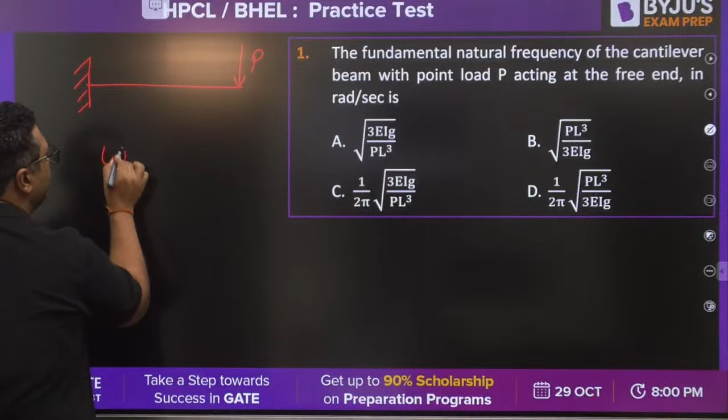Just like and share the session so other students also join. Solve this question, guys. They are saying there is a cantilever beam - this is a combination question of SOM and vibration, and there is a load P acting, and they are asking what would be the natural frequency of vibration due to that. That is the question. Solve it and tell me the answer. It is a very good question, guys, try to solve it.

Anu Ajay, good morning dear. Pratik, good morning. Dharawat, Kiran, Anu, Pratik, try to solve it and give me the answer. This is a question from vibrations, and it is about static deflection of mass. I am going to take care of all the design subjects: strength of material, theory of machines, machine design, engineering mechanics.

Ranjit, Vineet is saying the answer is A. Very good, Vineet. What about others? Kiran, Dharawat, Pratik, Ranjit, Anu, what would be the answer? Vineet has already given the answer as A. Kiran is saying the answer is C.

Let us see. This beam will be deflected like this, and this is given as the deflection of the beam at the point of application of load. This deflection Y is given as PL cube upon 3EI. When we talk about the method called static deflection of mass, also known as the Rayleigh method, according to this method omega n is given as square root of g by delta naught, where delta naught is the deflection at the point where the load is acting. So you just need to put this value here, and when you put the value, you get 3EIg upon PL cube. So the answer is A - Vineet's answer is correct.

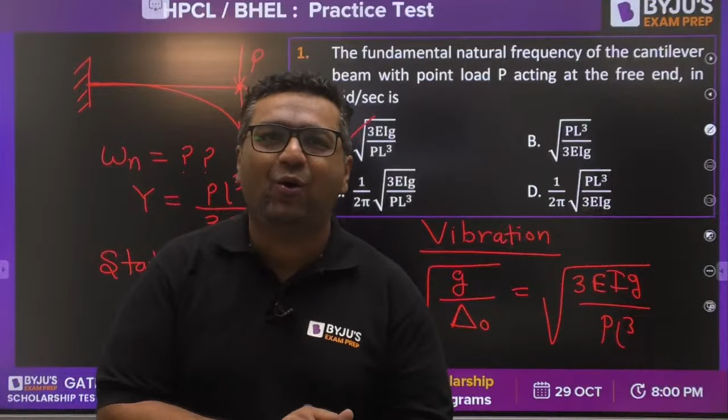HPCL GATE knowledge, I feel the answer is going to be A, because they have asked the answer in radian per second. Whatever you are saying, C would be the answer if they were asking in hertz. So guys, that is the mistake you have done. The question was asking the answer in radian per second, not in hertz. If they were asking in hertz, C would be the right option. Naveen, Chintan, I feel you understood your mistake.

Let us move to the next question. This is a question from material science, guys. Solve this question, they are asking about HCP atoms: the structure which has the highest packing of atoms. Just solve it, guys, what would be the right answer for this one?

Buddha Harsha Vardhan is saying A, Chintan is saying D, Naveen is saying A, Hania Amir is saying D, Parth is saying A, Achint Saxena is saying A, SK says A, Kishan A, Mani A, Kishan C, HPCL GATE knowledge says A, Mohan Raj A.

So guys, when we are talking about HCP, BCC, FCC, I feel everyone would be aware that for FCC the atomic packing factor is 0.74, for BCC it is 0.68, for HCP it is again 0.74, and for simple cubic it is 0.52. So if you see, for FCC and HCP it is going to be equal and highest. So the answer is going to be both A and C, which means the answer is going to be D.

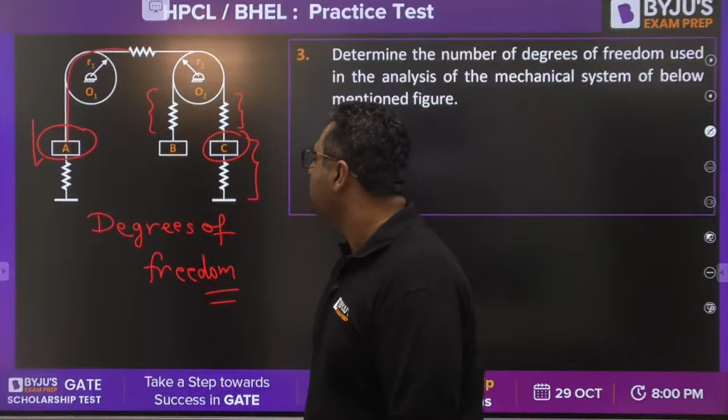So guys, if you see the degrees of freedom, first of all because of this mass, one motion will be there, and because this mass is directly connected to the string up to this point, there will be only one motion related to this one. Now, when we talk about this mass, this will also have one motion coming because of this spring-mass system. But because of this spring, one more degree of freedom will be attached to it, and because of this spring, one more degree of freedom will be attached to this. So guys, degree of freedom will be 4 for this case. One is coming because of this spring-mass system, another because of this spring-mass system, one because of this, and one because of this. Because they are directly connected, there will be no problem with rotation, and there will be no degree of freedom coming due to pulleys. So the answer will be 4 for this.

So Vineet has given the right answer. Vineet, you are doing very nicely, so I will say wonderful. If you perform in this way, definitely your selection is confirmed.

Next question is again from Theory of Machines, that is Coriolis component of acceleration. So guys, this is from Coriolis component of acceleration, what will be the answer? This type of question you can expect in BHEL, where calculations are involved much, so this is good for BHEL. The previous three questions were good for both BHEL and HPCL. What would be the answer?

Very good, Vineet. Wonderful, Vineet. Good understanding of yours.

What would be the answer for this one, guys?

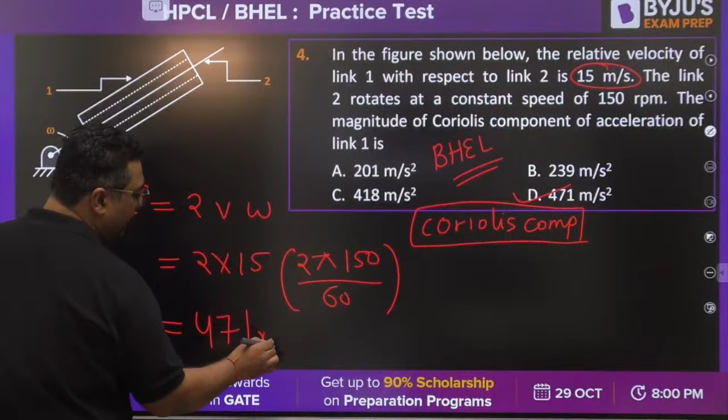Guys, your answer is correct. Because here they are asking Coriolis component of acceleration, which is given as 2 into V into omega. You know it is already mentioned that velocity is 15 meter per second, so you can write 2 into 15. Omega is nothing but 2 pi N by 60, and N is 150 divided by 60. When you put these values, the answer comes out to be 471 meter per second square. Yes, it will not come exactly 471, it will come 471.23.

Thanks Vineet for your wonderful words, for your faith. Thanks for that. Let us move to the next question, guys.

Now the question is from strength of material. This question is good for HPCL. So guys, the topic is strain energy.

Very good, Naveen, Kishan, Vineet, Parth, very good. Kiran, Chintan, Hania. What about others? I am waiting for your answer.

What would be the answer, guys? Strain energy they are asking. This is very easy, just apply the formula of strain energy. I am giving you a hint also: strain energy is half into P into delta. Just put the value of delta, you will get the answer.

Achint is saying D, Kiran is saying D, Chintan D, Shekhar Chandra D, Manas D, Hania Amir D, HPCL GATE D, very good. Pudina Yadav has also arrived. Parth D, very good guys.

So the answer for this is D, because when you put the value 1 by 2 into P, delta is nothing but PL upon AE. So when you put the value, the answer comes out to be P square L upon 2AE, and the answer for this is nothing but D. Very good guys, so D will be the right answer.

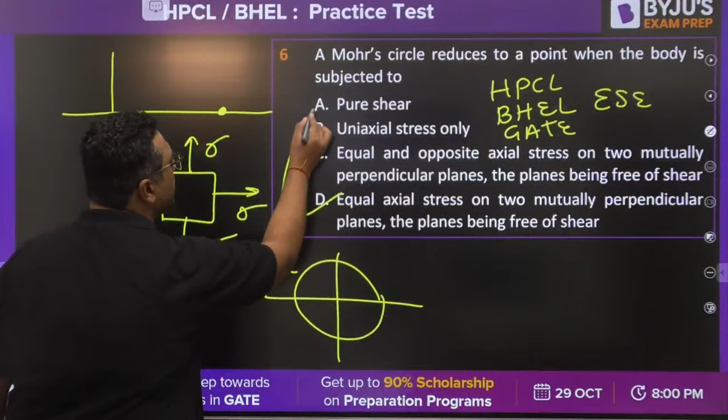So guys, the answer is D. You know that they are asking when Mohr circle is becoming a point for this state of stress. You know that when sigma equals sigma equals sigma equals sigma, this is the case, so for this, Mohr circle becomes a point. For pure shear, they are asking, Mohr circle is not a point, this is the case of pure shear. For uniaxial loading, this is the Mohr circle. So for uniaxial, this is the Mohr circle. So the answer is going to be D for this.

That's great, very good. So guys, the next question is from theory of machines, gear topic. It is a very easy question if you see. Very good, Vineet, Hania Amir.

Okay, so question number 7, guys. As I already said, we are going to cover 100 questions.

Ranjit is saying D, Deepak is saying D, Achint is saying D, Kiran is saying D, Sagnik D, Hania Amir D, Chintan D, Deepak Yadav, Vineet, Mani, HPCL Gate Knowledge, Parth Patel - very good, wonderful guys.

And the answer is D, because rack and pinion is the arrangement which converts the rotary motion into linear motion. So rack and pinion is the right answer, guys. This is from the application of gear.

As this practice session is for both HPCL and BHEL, I have taken some questions which are related only to HPCL level, some which are for BHEL - they are the difficult ones - and some which are for both. Next question is from aluminium.

What is the crystal structure of aluminium?

Deepak Yadav says FCC, Kiran says C, Ranjit says C, Chintan says A. Okay, so it means FCC only.

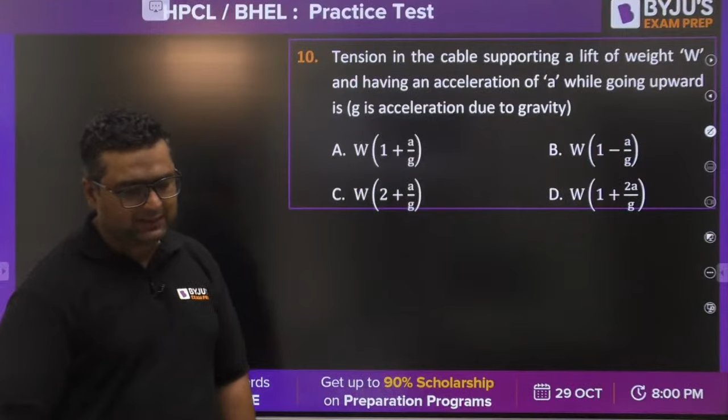So guys, this is once again from engineering mechanics. Tension in the cable supporting a lift of weight W and having an acceleration while going upward is - just solve it. This is a cable, W is the load. You just need to write the equation, considering it has an acceleration A while going upward.

Wonderful, Shekhar Chandra is saying A. HPCL Gate says A, Mani says A, Kishan says A. Very good, guys.

So you know that here will be W, here will be the tension, and here will be the acceleration. So what will you write? W is nothing but M into G, so mass can be written as W by G. So you write the equation: W minus T is equal to W by G into A. When you find out the tension, it comes out to be W plus... wait, I have put it something wrong.

W into 1 plus A by G - A will be coming as the right answer. Yes, I had put the values wrong. So the answer will be A, because it is going upward. When you put this value, it becomes T minus W is equal to M into A, where M is nothing but W by G into A. So you will get the answer as A.

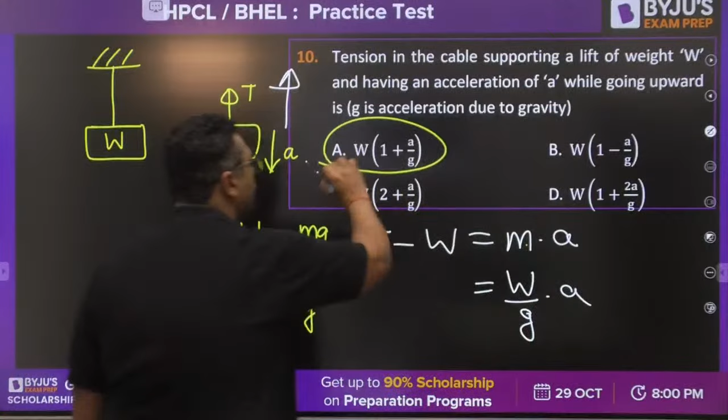Wonderful, great. Fine guys, next question.

This is once again from balancing, theory of machines.

Pragnesh, Chintan - very good. Going up - yes Abdul, wonderful. Abdul, you also came after so many days. How is your preparation going on? Yes Abdul, if you want any kind of help, you can connect with me, okay? Because I feel after so many days you've come back.

Sagnik is saying C is the answer. What about others? Kiran is saying B. Yes, Chintan. Pragnesh, what would be the answer? Vineet is saying C, Hania Amir C, Chintan C, Gajodhar C, Pragnesh 50.

Here what you need to do is M1 R1 equals M2 R2. So a body A weighing 10 kg with its CG at 25 centimeters. This is 10 into 25 equals 5 into R2, and you need to find out R2. So you will be getting 50 centimeter as the answer. Yes, 50 centimeter will be the answer.

Wonderful, guys, so this is again of Hpcl type. Let us move to the next question. Now once again we are entering into the strength of material. This is about point of contraflexure.

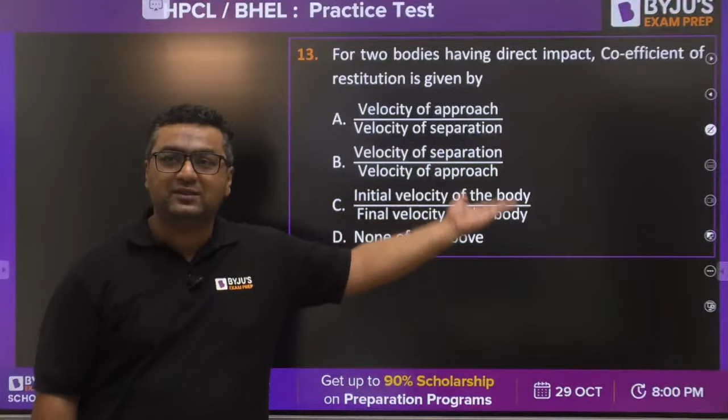Achint is saying A, Kiran B, Kishan B. Look, for this question also you guys are giving different answers. Abdul is saying B, Shekhar B, Hania Amir B, Mani B. So guys, when we are talking about this, it is velocity of separation by velocity of approach. The answer is going to be B. This is about coefficient of restitution.

Very good, Vineet, Naveen. Next question, guys, this is from strength of materials. This is a good one, and this is also good for GATE examination. This is also good for BHEL. Hpcl you can say yes, because this is not involving much calculation.

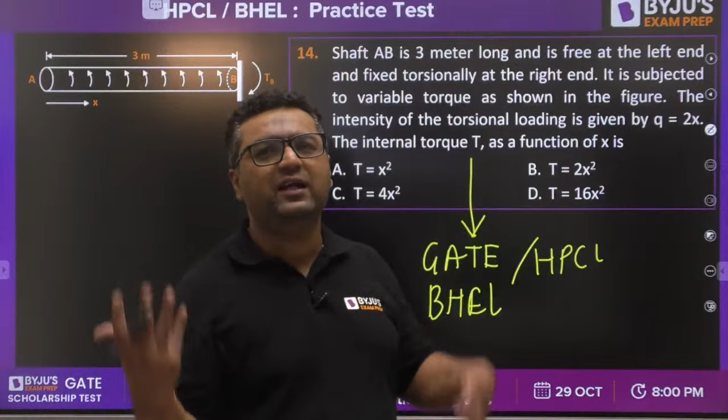Ranjit, velocity of that - whatever I have mentioned, the coefficient of restitution is defined as velocity of separation by velocity of approach. If you have any doubt, I will share you the notes of mechanics. You can go through that in the collision topic, what is final by initial, initial by final. Everything is defined there. Good afternoon, by Prem Nalla.

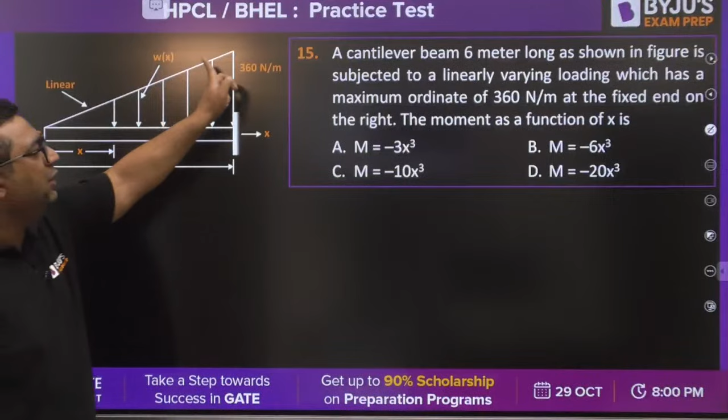So guys, next question is this one. This is a cantilever beam, 6 meters long, as shown in the figure. You have a uniformly variable loading, and they have mentioned this W value as 360 Newton per meter, and the moment as a function of x. You need to write down the equation for moment.

Okay, already answers are coming.

Sir, please give more focus on HPCL. Okay Kishan, because BHEL is postponed, that is the reason, don't worry. Since BHEL is now postponed, whatever upcoming sessions there are this week after Diwali will be only for HPCL. This particular session was already planned before BHEL postponed the date, so in this session we are taking both types. Otherwise, in the upcoming week, whatever sessions there will be, we'll concentrate only on HPCL.

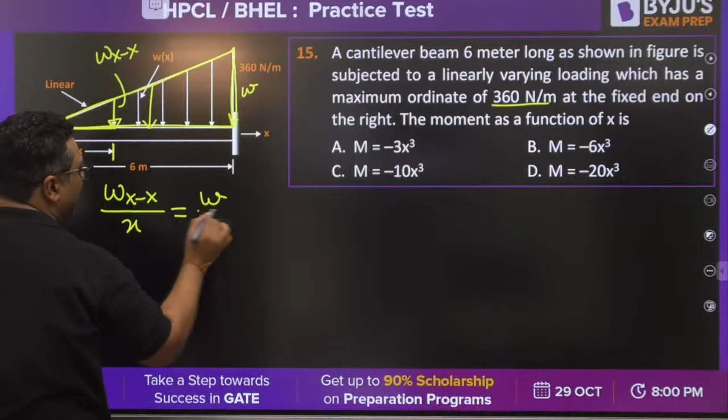Okay, so the answer is coming like this. Let us see. So guys, first of all, if you want to write the load at any instant at a distance of x, if you want to write down this intensity, we will take two triangles. One triangle is this, other triangle is this. So if you take these two triangles, I am writing this load as load intensity Wxx. So I can write Wxx divided by x equals the total W divided by L. So I can write Wxx as equal to W into x by L.

So if you want to write down the bending moment equation, I will take a section here, and to the left hand side of the section, this is the load intensity, this is Wxx. So if you want to write down the moment because of this, you will make the area of the triangle act at the centroid of the triangle, which is at a distance of x by 3. So you just need to do the area of triangle, which is 1 by 2 into Wx by L into x. This is the area of triangle acting at x by 3. And this is nothing but the bending moment equation Mxx. This is creating hogging, so a minus sign will come: minus Wx cube upon 6L.

Now put the values. You know that W is nothing but 360. It is minus 360 divided by 6, length is also 6, into x cube. So you will be getting the answer to be: C, M equals minus 10x cube.

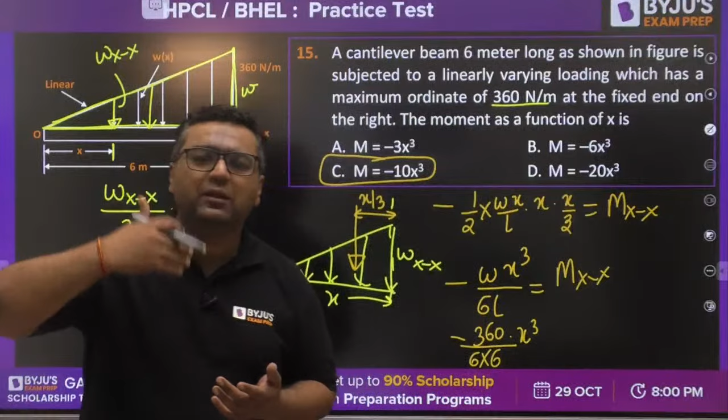Sir, TOM's one shot marathon formula - yes dear, after Deepavali it will happen. After Deepavali, we will be having theory of machines, engineering mechanics, machine design - these are the topics pending with me. And after that, we will be coming for the marathon of each and every subject, so don't worry about that.

Okay, moving to question number 16, guys, now. So next question is related to, once again, the strength of material. Let us see how many of you give the right answer for this.

Sir, GATE ke liye mock test - yes, after Deepavali it will be there. Very good, Abdul, wonderful guys. Solve this question, guys, now.

Solve this question, guys, this is a calculation-based, BHEL type of question. So guys, if you see here, both the bars, if we separate them, the load in them will be the same, which is 175 in compression. Here it is 175, you can apply method of section or free body diagram, and here also 175. So you just need to find out the deformation. Obviously compression is coming, so delta total will be delta 1 plus delta 2. So you just need to add them, and overall it is compressive, that is very much clear. So you just need to apply PL upon AE, apply that, get the answer.

Very good. Vineet is saying B, Kiran is saying B, Pragnesh is saying B, Gajodhar is saying B. बहुत ही जल्दी कर लिया आप लोगों ने.

Very good, let me check the answer. Yes, 175 by 168 is correct one. Wonderful, Abdul, बहुत बढ़िया, God of Thermodynamics, बहुत ही बढ़िया. Guys, the answer is correct, 175 by 168 mm is the right answer. Yes, Kiran Nayak, बहुत ही शानदार, guys. Moving to the next question, guys.

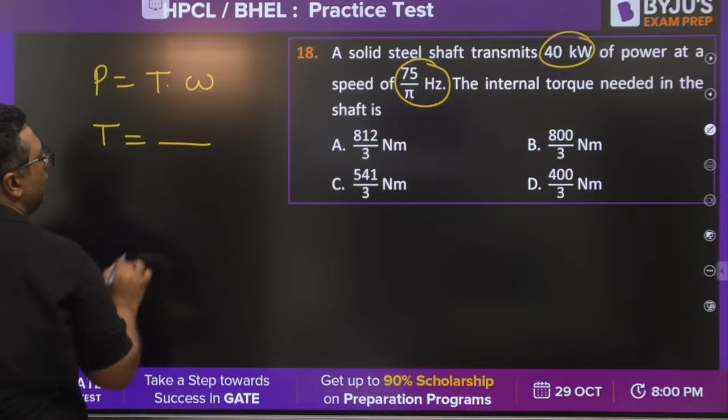Once again this is from strength of material. This time they have given you the power, and they have also mentioned the frequency in hertz. So they are asking you the torque. You know power is T into omega. From here you need to find out the torque, and omega is nothing but 2 pi f. So f is given to you, use it, get the answer.

Yes, Vineet, बहुत बढ़िया. So guys, don't worry. My portion, once it will be over, then next faculty will be coming for the next part. So 4 faculties, all 4 will be joining for this session, and you guys will be getting 100 good questions in this session. Minimum 100 I am saying, because I am exceeding, 3 questions more I will be taking. So in place of 25 I am going to take 28 questions. So 103 questions are confirmed for you.

Wonderful, guys. Achint, Chintan, Pragnesh, Shekhar Chandra, Vineet, Ranjit Kumar, Hania, Amir. The answer for this is nothing but B, 800 by 3 Newton meter. So torque will be coming out to be 800 by 3 Newton meters.

Okay guys, moving to question number 19 now. This is once again from strength of materials. A simply supported beam, the point of maximum moment in the beam from RL is. They have even calculated the support reactions for you. So you need to find out the point where bending moment will be maximum. You know bending moment is maximum where dM by dx will be 0, which is nothing but shear force. So you write the shear force equation, equate it to 0, you will get the answer. Very easy question, guys.

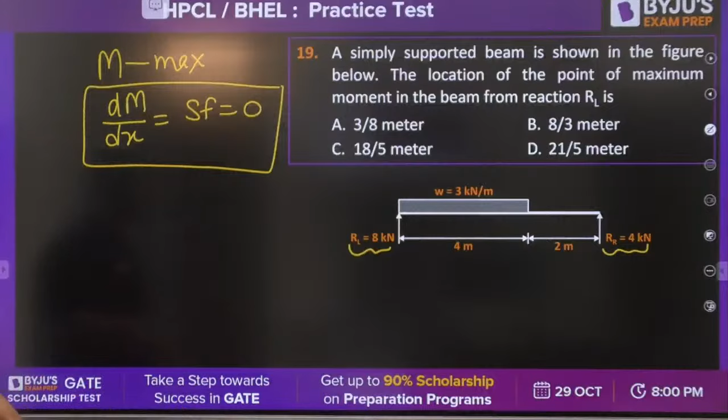Definitely some of you are going to get selected in HPCL and BHEL. Ranjit Kumar Yadav, the answer is 8/3 meter. So you just need to write down the equation. Shear force equation at any section is, this is plus RL minus W into X. So when you will be putting it equals to 0, so you know that RL is 8 is equals to 3 into X. X will be coming out to be 8/3 meters. Okay, yes, this question would be good if they would be asking the distance from RR, then many students would be doing the mistake. So the answer is B, that is correct.

Moving to question number 20th, guys. Okay, so just go to description box for downloading the ebook and all. This is a very good question from thermal stresses. Very good question from thermal stresses.

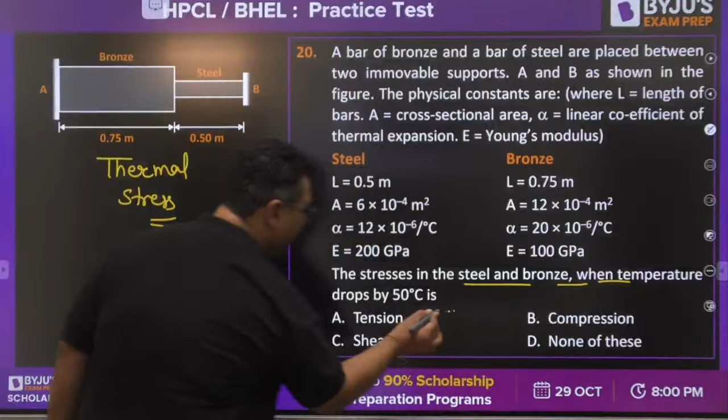Okay, so Kiran is saying A, Vineet is saying A. So guys, just you need to see one thing, that the stresses in the steel bronze when temperature is dropped by 50 degrees Celsius. When temperature will be dropped, you know that all the bodies in this universe except water, they expand on heating, contract on cooling. So we are going for cooling, so definitely my dear, they will try to contract. When they will try to contract, these supports will be applying the forces in this direction, because they will try to leave, the support will apply reaction opposite to that, and because of these reactions, both the members will be coming under tension.

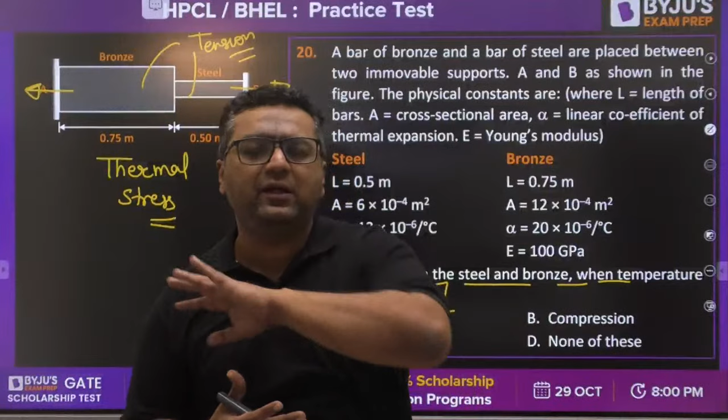In the question some extra part is there, but in actual this is just a concept game. This extra part you can use to find out those stresses also, then it becomes a question of gate level. In gate, they will not ask this, they will ask the stress values.

Moving to the next question. So guys, this is a combined question from SOM and machine design - this is from design of shaft.

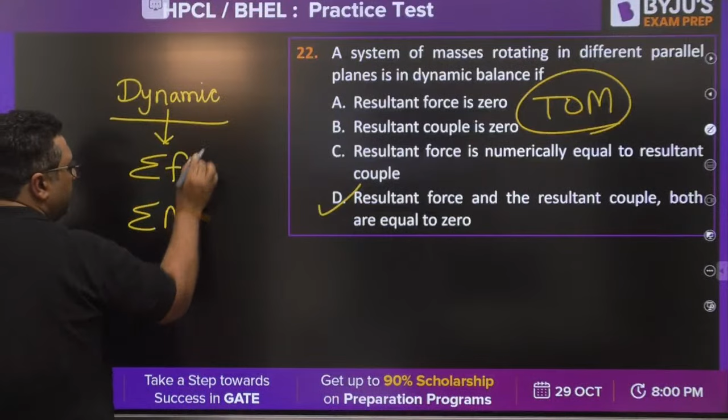So the answer for this is D, because when we are going for dynamic balancing, the summation of forces and summation of moments both need to be balanced. Whereas in static balancing, we need to cover only forces, moments are self-balanced.

Moving to question number 23 guys, this time from spring, machine design question. This question is from spring, cutting of spring, machine design. You can also call it vibration, I have covered it for you. Solve it guys.

Very good. Lavanya Patel is saying A. Ranjit Kumar Yadav is also saying A. Kiran Kumar is also saying A. Vineet Shah is also saying A. Pragnesh A, very good.

So guys, you know that if we have a spring and if that is divided into 2 equal parts, then individual stiffness will become 2K. So if that division will be in n parts, then individual stiffness will be nK. So the answer is A, because stiffness is inversely proportional to length - when length becomes 1 by n times, stiffness will become n times.

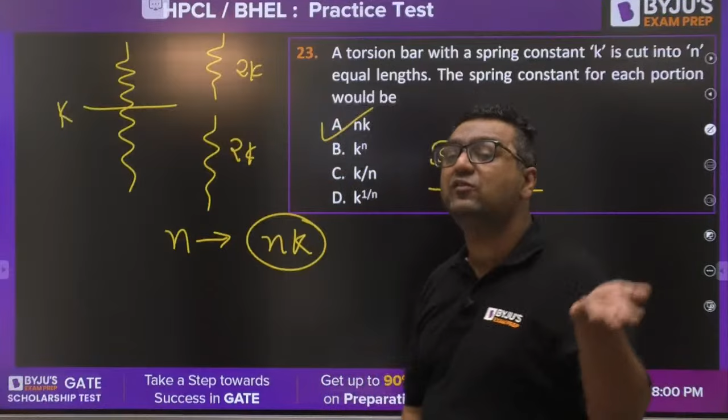So guys, question number 24, again from vibration, logarithmic decremental ratio. Ha Lavanya, needs to be 0 - resultant force, resultant moments needs to be 0.

So logarithmic decrement of a damped single degree of freedom system is delta. If stiffness of the spring is doubled and mass is made half, then the logarithmic decremental ratio, delta equals 2 pi zeta by square root of 1 minus zeta square, where zeta is C by 2 root KM. Now you need to answer it.

So guys, they are saying that stiffness of the spring is doubled and mass is made half. So when stiffness is doubled and mass is half, overall will remain the same. So the answer will be B. Delta will be the right answer.

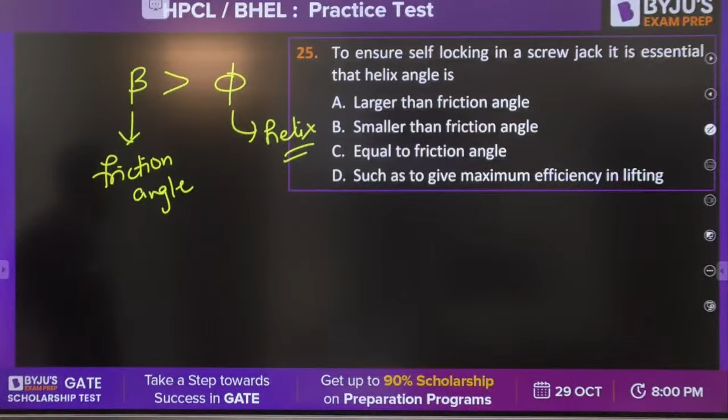Self-locking condition will be coming when beta is more than phi. Beta is friction angle, phi is helix angle. This is the condition for self-locking: beta is more than phi. So helix angle should be smaller than the friction angle.

B will be the right one. Some of you have given the wrong answer for this. Moving to the next question, guys. This is the 26th one, 3 more questions.

Solve it, degree of freedom. How we can find degree of freedom, theory of machines. What would be the answer for this? You need to apply the formula 3 into L minus 1 minus 2J minus H. Very good, Achint, Mani, Chintan.

Question number 26. 2 more questions I will take, and then the next faculty will come for the next part.

Grubler's or Kutzbach - some are saying B, some are saying D. First of all, the number of links: 1, 2 and 3, so the number of links are 3. Minus 2J, joints - this is joint, this is joint. Higher pair is 1, this is higher pair. So 3 into 2 is 6, minus 4, minus 1. Answer is 1. A would be the right answer, guys.

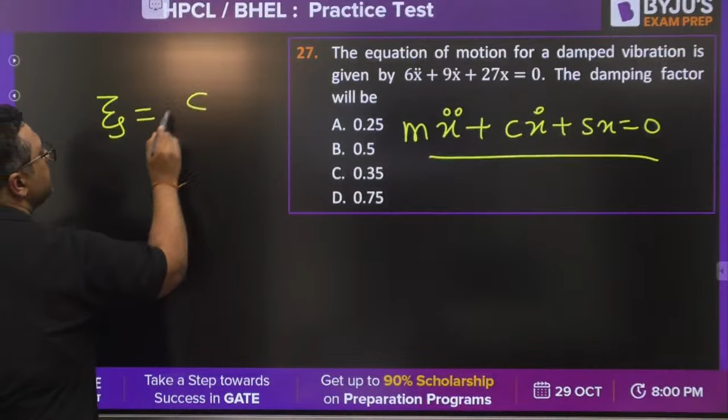This is once again from vibration. They are asking you the damping factor. You can see the equation like this, compare these two equations. MCS, damping factor, you need to find out. Zeta is damping factor, C by 2 root SM. Solve it and get the answer.

After this, one question from machine design, brakes is there. Shivanada is saying 1, but 1 is not in the option, I feel.

Okay, for 26 you are saying. Kiran is saying 27th ka C. Lavanya is saying C, Vineet is saying C, very good. Pudina Yadav is saying C, very nice. Pragnesh C, Ranjit Kumar Yadav C, very excellent, guys. And the answer is C.

You just need to put the values. 9 divided by 2, S is 27 into 6. The answer will be 0.3535. Answer is C. So guys, the last question from my side.

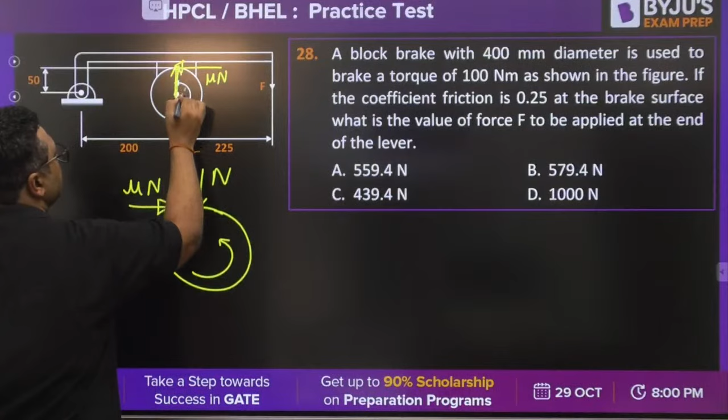From the brakes, last question from my side. You can see this is force F acting. If we are going for the free body diagram, this is rotating like this, so normal reaction on this will be coming and friction will be coming like this. The same friction will be coming on the lever like this, and normal reaction will be coming like this. So you just need to take moment about O.

Summation moment about O to be 0, you will get the value of F. You can see F is creating clockwise moment, so plus F into 425. Then N is creating anti-clockwise, minus N into 200. Then this is creating anti-clockwise, minus mu N into 50. Equate it to 0. They have given you the diameter value and the braking torque value. Braking torque is nothing but mu NR. From here you can find out N, put it here, get F. This is BHEL type of question.

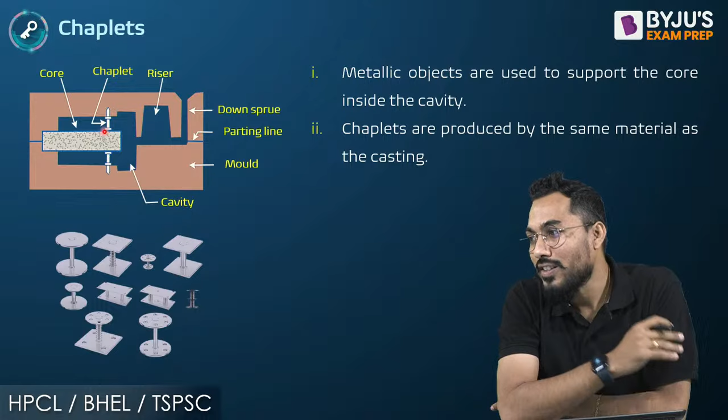So what is the answer - Mani, Vinith, God of Thermodynamics, Anchit and everybody - the answer would be exactly related to casting. It is related to the casting process. This would be my typical answer. Chaplets are used in the casting process, right? Next question.

The next question: the tendency of material to fracture without appreciable deformation - what is that called? Will it be called plasticity, stiffness, brittleness, or toughness? What will it be called?

Very correct everyone - Vinith, Shiva, Lavanya, God of Thermodynamics, Ania. We know there are two types of materials available - one is ductile material, second is brittle material. Ductile material can undergo maximum plastic deformation before fracture takes place, but brittle materials are the ones which do not undergo that much plastic deformation.

That can be observed from the UTM testing machine. Whenever we apply uniaxial tensile force on the body, the body will go through a lot of stress, but the deformation is very, very small.

So suddenly the body will fracture. Therefore, can I say that brittle materials are the ones which do not undergo much plastic deformation? This property is called brittleness property. Very interesting question. Is it accepted? Yes, brittleness would be the name.

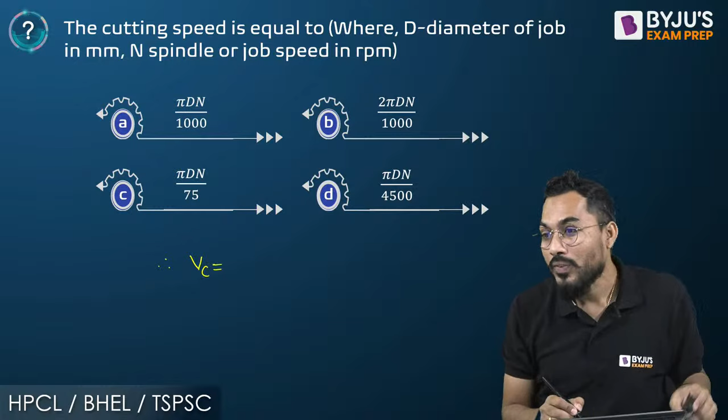It's very simple - can I say cutting speed VC is exactly equal to pi d n? Pi d is in cutting speed, so it will be exactly equal to pi into d into n, which will be exactly equal to cutting speed.

Divided by what? Diameter is generally given in millimeter. So can I say that this diameter, given in millimeter, has to be converted into meter? That's why I'll divide it by 1000. Is there any answer?

Yes sir, A is the answer. Vinith, Ania, Mani, Shua, very correct. What is that? Pi d n divided by 1000. So this will be my answer.

Divided by 1000, why? Because the diameter is clearly given in millimeter, and to convert that millimeter into meter, I divide by 1000. Is it understood? Yes. Next question is coming.

If the rake angle of the cutting tool is alpha - let's say it is alpha, the rake angle of the cutting tool. Phi is the shear angle. And V is the cutting velocity.

Then the velocity of the chip sliding along the shear plane is given by what? What will be the value of the shear plane velocity? What is meant by shear plane velocity - the velocity of the chip along the shear plane.

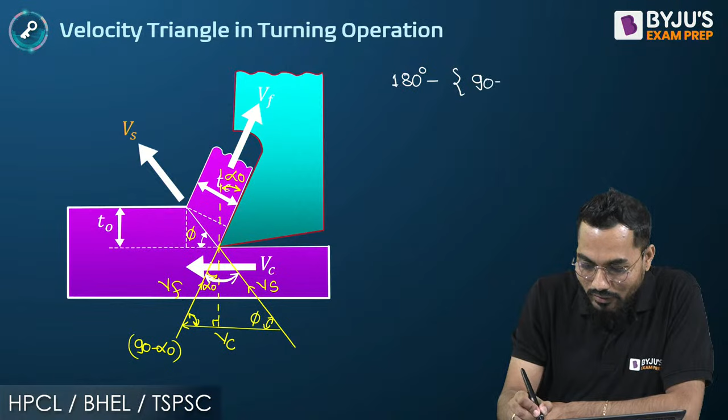This total angle in this triangle, how much will it be? That will be 180 degrees minus 90 minus alpha 0, plus phi. Is it okay? Yes. So if I simplify that, this angle will come to 90 minus phi minus alpha 0. Is it correct?

Yes. Now apply the sine rule. Can I say cutting velocity Vc divided by the sine of the opposite angle, that is sine of 90 minus phi minus alpha 0? So can I say it will be cos of phi minus alpha 0?

Which is exactly equal to shear plane velocity Vs divided by the sine of the opposite angle, 90 minus alpha 0. So again it will be cos of alpha 0. So I'll take cos of alpha 0 to the left hand side.

So I'll say shear plane velocity Vs is exactly equal to cutting velocity V, written as cos of alpha 0 divided by cos of phi minus alpha 0. So what is the answer? V cos alpha divided by cos of phi minus alpha 0.

So what is the answer? The answer is A, not B, not C. It is not sine, it is coming cos, it is coming cos. Are you accepting, everyone? Why did everybody make a mistake? That's why you should never mug up the formula. You should only focus and concentrate on the things related to the figures.

So easily we can calculate this. Is it okay? Are you accepting everyone? Mani, Pragnesh, Kiran, Lavanya, are you accepting A is the correct answer here? A is nothing but the correct answer here. Look how the trap is there. Okay everyone?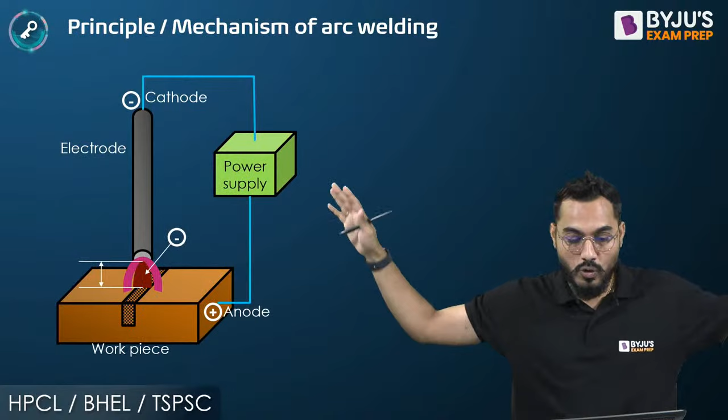I think you are understanding. Next question, very interesting question.

What is it? Anyone see? Absolutely correct, it's very simple. How to calculate that? There is a derivation that comes into the picture - shear force and normal force can be converted in terms of FC and FT, or calculated in terms of FC and FT.

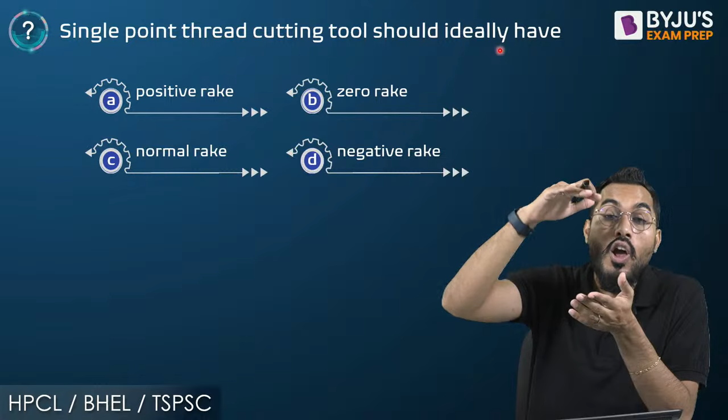It is very true, sir. Whenever I am utilizing zero rake angle, whichever chip is generated will be thrown away easily from the machining zone. If it is a positive or negative rake angle, there might be chances that it will damage the thread profile, because the chip might flow in a lateral direction. That should not happen.

Therefore, to protect the flank surfaces in the thread cutting operation, I have to generate my single point cutting tool with 0 degree rake angle. This will be my answer. 0 degree rake angle has to be there. Is it okay, Kiran Kumar, Pragnesh, Umar Sheikh? Right, 0 degree. Next question.

In electric discharge machining process, the workpiece and electrode are submerged in. In EDM, electric discharge machining process, the tool and the workpiece are immersed in a certain medium. Which medium? Is it immersed in a dielectric medium, an abrasive slurry, an electrolytic solution, or a vacuum?

Sir, it is very correct. It is not an abrasive slurry, boss. Abrasive slurry is utilized in an ultrasonic machining operation. It is the electric discharge machining operation where the dielectric medium is used, in which this entire tool and the workpiece is submerged.

And why dielectric? Because there will be a potential difference created between the tool and the workpiece, across the optimum gap, and because of that potential difference, there will be a sudden discharge of electrical energy, which is called arcing. So I'll say dielectric fluid, not a vacuum. Vacuum is not created, boss, in the electro discharge machining operation.

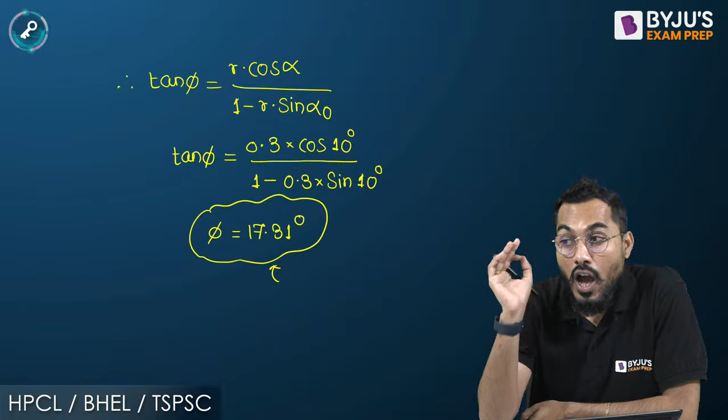This is exactly the answer as far as the phi value is concerned. So phi value is calculated, the shear plane angle phi is calculated. And once you calculate the shear plane angle phi, you put all the values there.

So shear strain is exactly equal to cot phi, that is cot of 17.31 degrees, plus tan of phi, that is tan of 17.31 degrees, minus alpha 0, that is 10 degrees. So the shear strain is coming out correctly. Mithun, Kiran Kumar, Pragnesh, Pratik, Umar, Kuldeep Singh, and everybody has calculated it correctly. It is coming to 3.34 shear strain.

What is the unit of that? Sir, it is a unitless quantity because it is shear strain. Strain has no unit. So therefore this will be my answer.

Dekho, a very simple question on the metal cutting platform was asked. Without a calculator, the questions won't be possible. Yes, right, the questions will be possible, won't be possible like this. But these are the questions that are coming, right, fine.

Next question. In a dash process, the cross section of the bar is increased at the cost of reducing its length. So can I say that there is a bar whose cross section area has to be increased at the cost of the length reducing? This operation is called drawing down, or spinning operation, or upsetting operation, or reaming operation.

Now in HPCL, these questions won't be asked. These questions will be asked in BHEL, or it can be asked in TSPSC or some other exams. If calculator is not allowed, then simple questions like theory questions would be asked, and that's why we are taking a lot of theory questions so that we'll get a feel of that.

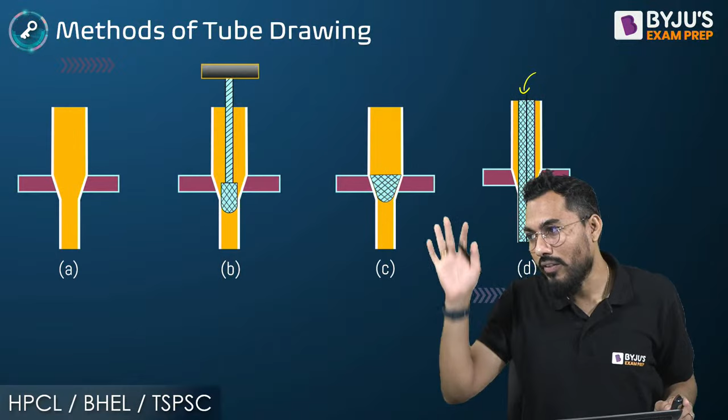What is the answer then? So very simple - my answer will be exactly equal to tube drawing is the one where moving mandrel is utilized. And let's see, this is just a random fundamental question. I think everybody has given a correct answer. Very correct answer given by everybody. Right, fine, next question.

Again there is one scintillating numerical asked. Let's see - in an orthogonal cutting, the depth of cut is 0.5 mm, at a cutting speed of 2 meter per second. If the chip thickness is 0.75 mm, the chip flow velocity - that is VF, chip flow velocity, the velocity of chip with respect to tool, because chip is flowing over that particular tool, over that rake surface.

So calculate chip flow velocity and tell me what will be the answer. Kuldeep, Pratik, Sai Kiran, Naveen, calculate. Very simple question, without calculator it has to be calculated. Tell me chip flow velocity. Depth of cut is given 0.5, cutting speed is given 2 meter per second, chip thickness is given.

1.33. Sir, we know that if I ask you a question, chip thickness ratio R - can I say the formula is chip flow velocity VF divided by cutting velocity V? What is that formula, VF by VC? Do you understand? Yes, there is one relation where chip thickness ratio can also be calculated as chip flow velocity VF divided by cutting velocity VC.

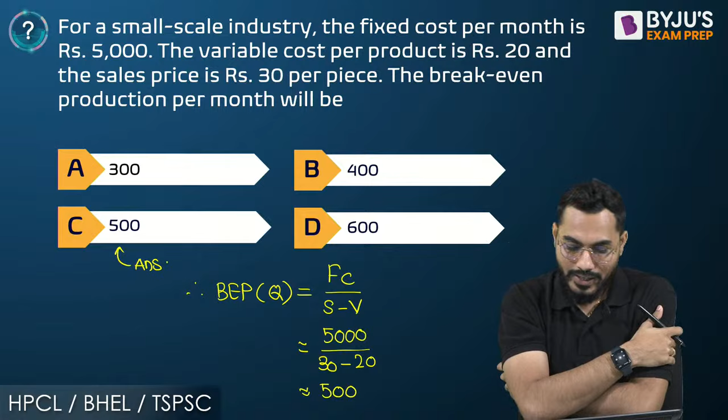Now you tell me, consider the following statement: the break-even point has to be increased. I have to increase the break-even point. Now, which of these statements is the correct one? So, for increasing the break-even point...

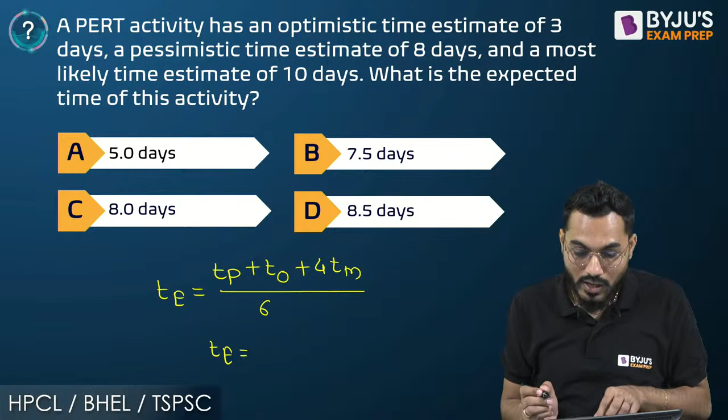So expected time is: pessimistic time is 8 days, optimistic time is 3 days, and most likely time estimate is 10 days, divided by 6. So how much is the answer coming? 7.5 days is the answer.

So there will be one homework question I'll give: the earliest time estimation of this particular event. Calculate the earliest time estimate. Is it 7.5 or 8.5? I'll say that 8.5, so Delhi D is the correct answer here, not 7.5, 8.5. Delhi D is correct.

Now you can go and check these questions. You can calculate the most estimated time calculation, and also calculate the economic order quantity. These two questions I have given you for homework.

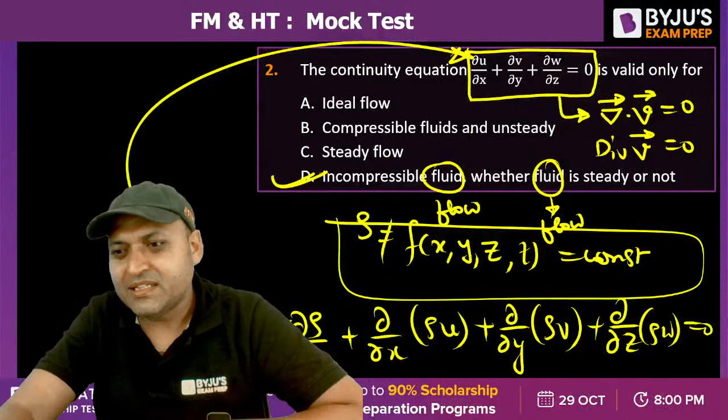All right, question number 3, very beautiful. Whenever the questions are theoretical, they are more conceptual rather than numerical. In numerical questions, you can use the formula and get the answer, so numerical questions are comparatively simpler. The only problem is you can commit a calculation mistake.

Otherwise, from a solution point of view, they are easier.

Yes, the flow can be possible from high pressure to low pressure. The fluid flow can be possible from low pressure to high pressure, or the flow can be possible without variation of pressure as well. It is the total energy which decides the flow direction.

It is always the total energy of the fluid which decides the direction of the flow. So it is not the pressure which decides the flow direction.

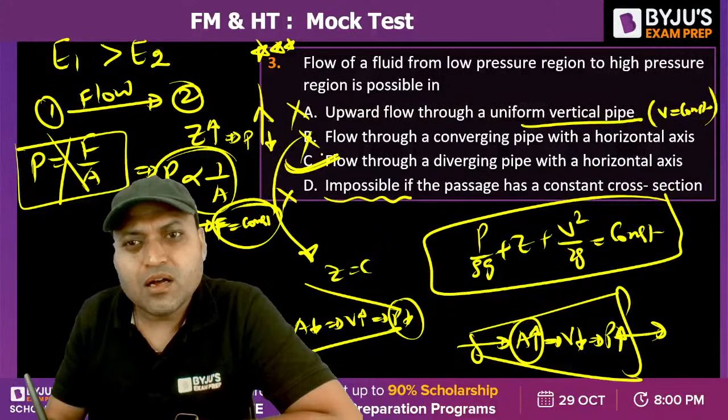So that is why, can you let me know when the flow is possible from low pressure to high pressure? Option C, right? Option C is the correct answer.

Question number 4 on your screen. Next, question number 4.

Give me the answer. The question is from losses in pipe. The loss of head in a pipe of 100-meter length carrying oil, the volume flow rate is 100 liter per second.

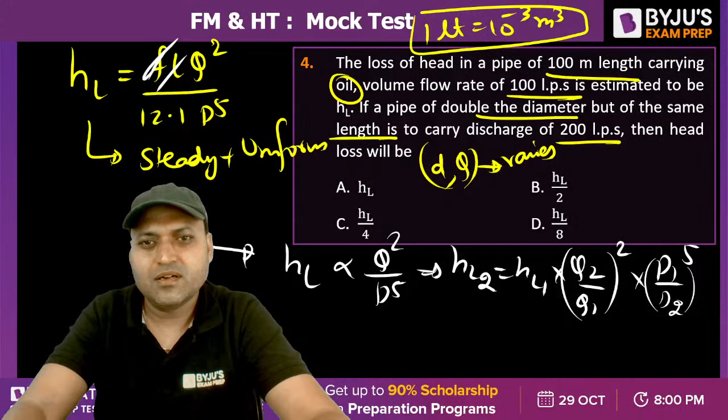Yes, the answer to this question is option D. D is the correct answer. D will be the right answer. It is D, isn't it D?

HL2 is equal to HL by 8.

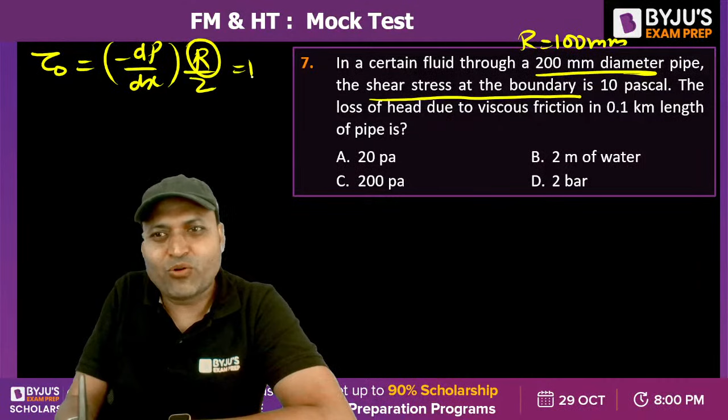Very, very beautiful question. The loss of head due to viscous friction in 0.1 kilometer - you should take care of the unit. The length of the pipe is 0.1 kilometer, that is 100 meter. What is the head loss due to friction? HL will be how much? So HL can be written as delta PL by rho G, isn't it, in terms of meter of water. So minus dp by dx can be replaced by delta PL by L. Why? Because P is a linear function of x. So that is why dp by dx can be replaced by delta PL by L into R by 2. So from here we can find out delta PL. What is delta PL? First of all, find out the value of delta PL. Delta PL is equal to tau naught into 2 into 100 divided by R. What is R? 100 mm.

That is 0.1 meter, divide by rho of water into G. You can take G as 10. So it will be 10 into 2 into 100 upon 0.1 into 1000 into 10. This 1000 and 0.1 will get cancelled out with this 10. So it is 2 meter of water, isn't it? It is 2 meter of water.

What is delta PL? That is 20 kilopascal, isn't it? 20 kilopascal, delta PL will be 20 kilopascal. Option could have been 20 kilopascal. It is not 20 Pascal. It is not 200 Pascal. It is not 2 bar.

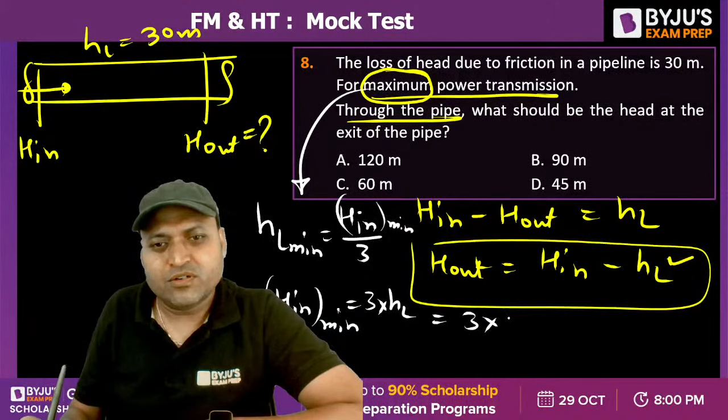Now HL is already known to us. We need to find out H in, because the question is about the maximum power transmission. The condition is to have the maximum power transmission. For power transmission to be maximum, HL should be minimum, that is H in by 3, isn't it? H by 3, so H in minimum will be equal to 3 into HL. What is HL? 3 into 30, that is 90 meter. The head at inlet will be 90 meter.

Put the value in equation. What is H out? So H out will be equal to H in, that is 90 minus HL, that is 30, will be 60 meter. Alright, so C is the correct answer.

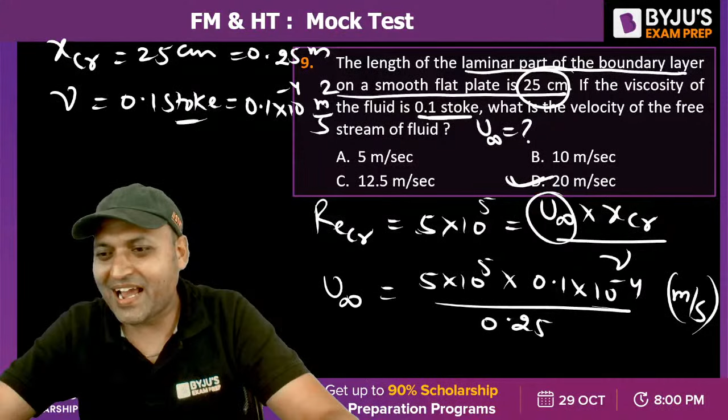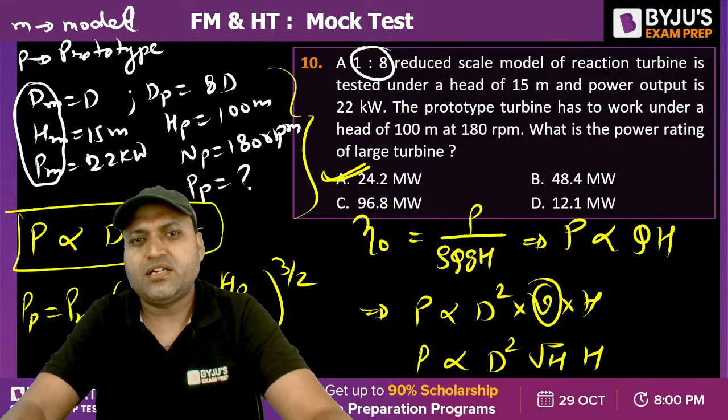Can you find out NP also? U is directly proportional to D into N, V is directly proportional to D into N, and root H is directly proportional to D into N. This is how you can develop a relation: U is directly proportional to D into N, so N is proportional to root H by D. So NP by NM will be under root of (HP by HM) into (DM by DP). This is how you could have calculated NP also. You should be able to develop the relationship correctly, starting from the basics: U is equal to pi dn by 60. You can start from this relationship.

The next one, question number 11. What pressure must be applied to water to reduce its volume by 0.092 percent? So minus delta V by V into 100 is equal to 0.092 - that is the percentage change in volume.

If the bulk modulus of elasticity of water at the temperature of operation is 2.19 gigapascal, that is 2.19 into 10 to the power 9 Pascal, what will be the change in pressure? Bulk modulus is delta P upon minus delta V by V - that is the formula for bulk modulus, which represents resistance to compression. So delta P is equal to K into minus delta V by V.

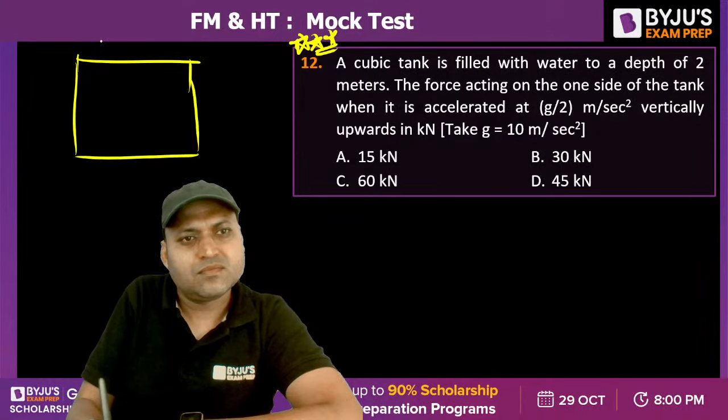Again, an important question from rigid body motion: a cubic tank is filled with water to a depth of 2 meters. There is a cubic tank - this is 2 meter, this is also 2 meter, this is also 2 meter.

It is filled up to 2 meters of water. We need to find the force acting on one side of the tank when it is accelerated at g by 2 meter per second square vertically upward. The acceleration is equal to g by 2, and g is the gravity acting in the downward direction. So what we need to do is find g effective, that is g plus a, that is g plus g by 2 - that is the effective gravity.

Average pressure is equal to rho into g effective into x bar, where x bar is equal to 1 meter. The force is equal to rho into g effective, with g taken as 10. It will be 3 by 2 into 10 into x bar, that is 1, into area 2 into 2, will be the answer. What is the answer? Question number 12.

Question number 12. Pressure into area, or you could have used rho into g effective into area into x bar. X bar is the depth of the centroid from the free surface, the depth of the centroid of the plane surface from the free surface. That is x bar, I am using the notation x bar.

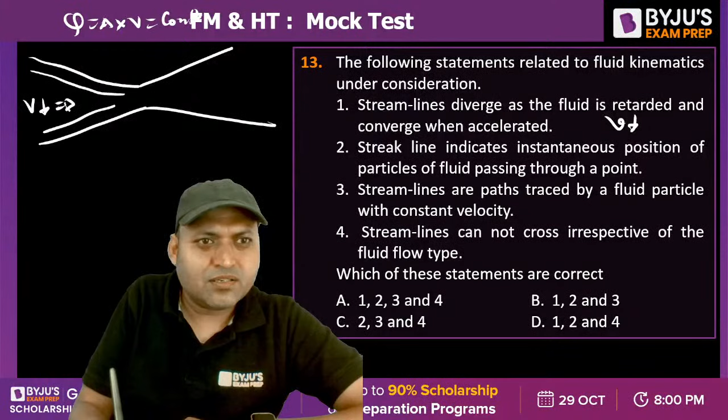Streamlines diverge as the fluid is retarded. Retarded means velocity decreases, and converges when accelerated. Yes, because the discharge remains constant for the steady flow. When the streamlines converge, when the velocity decreases... area is decreasing, velocity will increase. When the velocity increases, area will decrease, it converges. And when area increases, velocity will decrease, so there is a divergence. So the streamline diverges when the velocity decreases, yes, and converges when it is accelerated. Accelerated means velocity increase. Statement 1 is correct.

Streak line indicates the instantaneous position of the fluid particles passing through a fixed point, passing through a given point. That is the definition of the streak line. Streak line is the locus of the fluid particles at any instant, which must have passed through a fixed point.

Second is also correct. Streamlines are the paths traced by the fluid particles with constant velocity - this is wrong. Streamlines are not the paths traced by the fluid particles. Paths traced by the fluid particles are path lines. Third is incorrect.

Streamlines are the imaginary lines which are always tangent to the velocity of the flow. The streamlines are always tangent to the velocity of the flow. Streamlines are defined for the whole flow, not defined for the particles.

And fourth statement is that streamlines cannot cross irrespective of the type of fluid flow. Yes, because tangent to the streamline is velocity, and if the streamline crosses, it means there are two tangents at the intersection point, which means it will represent two velocities, which is not possible. So streamlines cannot cross - path lines can cross, but streamlines cannot. 1, 2, and 4 are the correct answers. D is the right answer for question number 13.

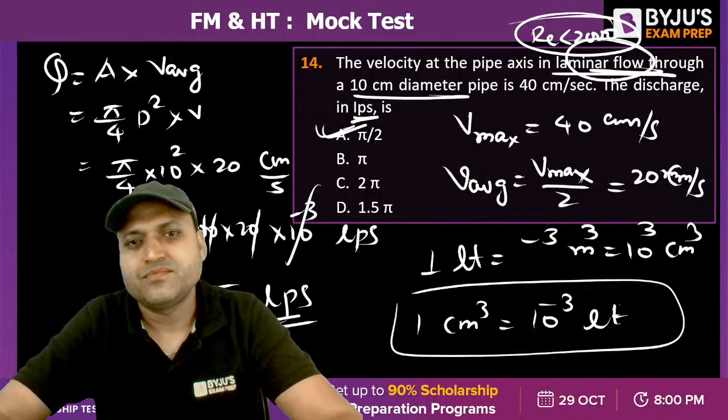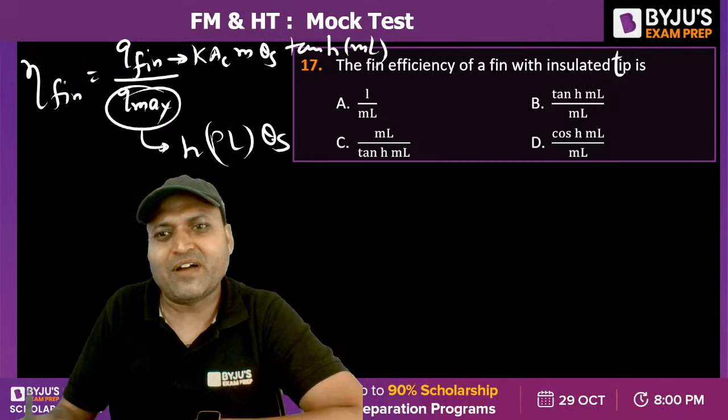And what is Q fin? That is Ka M theta S into tan hyperbolic ml. If you simplify this, then tan hyperbolic ml by ml, that is 1 upon ml into tan hyperbolic ml. That is the efficiency of the fin.

Question number 17 is B. Others are not responding, why? Only Kiran is giving the answer.

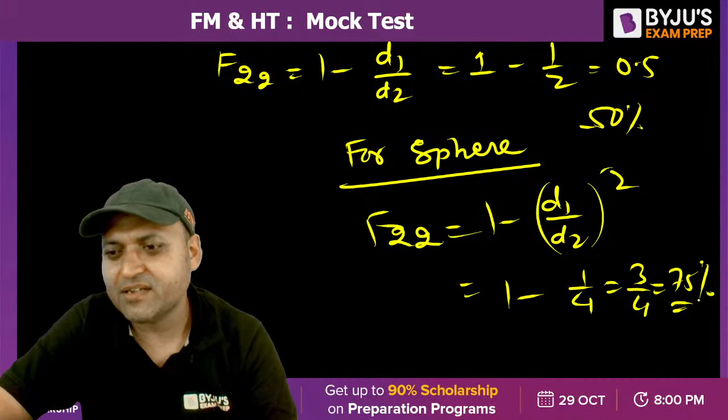That is 50%. If they would have been spheres, then F22 would have been 1 minus D1 by D2 square. For spheres, A1 would have been 4 pi R1 square, A2 would have been 4 pi R2 square. C is the correct answer for the given question. If they would have been spheres, it would have been 1 minus 1 by 4, that is 3 by 4 or 75%. For sphere it would have been 75%, and for cylinder it is 50%. C is the correct answer because they are concentric cylinders.

Question number 19. Question number 19 on the screen.

Mostly the questions will be asked from energy conservation. A steel plate is exposed to a solar heat flux of 800 watt per meter square on one side - this is the plate, let us say, there is a solar heat flux of 800 watt per meter square. The plate is exposed to air at 30 degrees Celsius on both sides. The convective heat transfer coefficient is 10 watt per meter square Kelvin on the back side, H1, and 15 watt per meter square Kelvin on the front side, H2 is equal to 15 watt per meter square Kelvin.

The equilibrium temperature of the plate - let me assume the temperature as Ts. So from the energy equation, Q in is equal to Q out, because there is no heat generation, no heat stored, steady state system. So Q in per unit time per unit area, 800, is equal to H1 into delta T plus H2 into delta T. Delta T is same, Ts minus 30. So 800 is equal to H1 plus H2 into Ts minus 30. Then H1 plus H2, 10 plus 15, into Ts minus 30 will give you the answer.

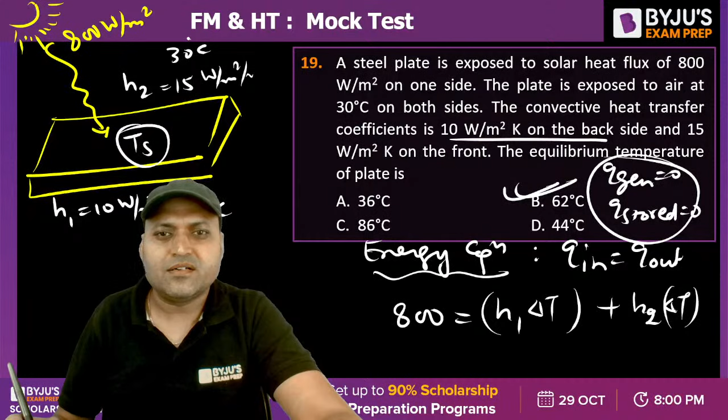Let us move to the next one. Question number 20. 5 more questions to go after this.

The center, beautiful question. The center to surface temperature difference in a heat generating cylindrical rod of diameter 8 cm is 30 degrees Celsius. There is a heat generation in the cylinder, and the temperature difference between surface and the center. Center temperature is maximum, T maximum minus Ts is given as, for the cylinder it is given as 30 degrees Celsius. Under similar condition, the center to surface temperature difference in case of a sphere of diameter 8 cm is.

Beautiful question. Question from the heat generation. Do you remember, do you know T maximum is equal to Ts plus Q dot R square by 4K for cylinder, and T maximum for sphere is equal to Ts plus Q dot R square by 6K for sphere.

So T maximum minus Ts for sphere upon T maximum minus Ts for cylinder is equal to Q dot R square by 6K divided by Q dot R square by 4K. So it will be 4 by 6. It will be 4 by 6. So this will be 2 by 3 into 30, which will give you the answer 20 degrees Celsius.

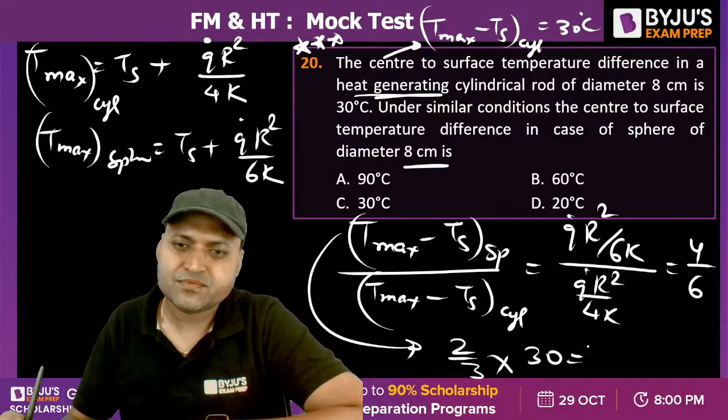D is the answer. Question number 20. Are you getting D? D will be the answer. 20 degrees Celsius.

#21. Again, very important question. A long cylinder, long length is infinite, has one of its ends inserted in the furnace and reached steady state condition. The temperature at 16 centimeter from the end was measured at T degrees Celsius. It is the question from the fin theory. The question is from the fin theory.

So the temperature variation is like this, exponential. This is the surface temperature, this is the fluid temperature. So this is x is equal to 0. At 16 centimeter, the temperature is T. T is the temperature at 16 centimeter.

Suddenly, a fan is switched on and the convective heat transfer coefficient over the surface increases 4 times. H becomes 4 times. Then the curve will be like this. This is first situation when H. This is the second situation when it is 4H. H becomes 4H.

Under steady state condition, the location at which the temperature will be T degrees Celsius. So the temperature will be T degrees Celsius at this location.

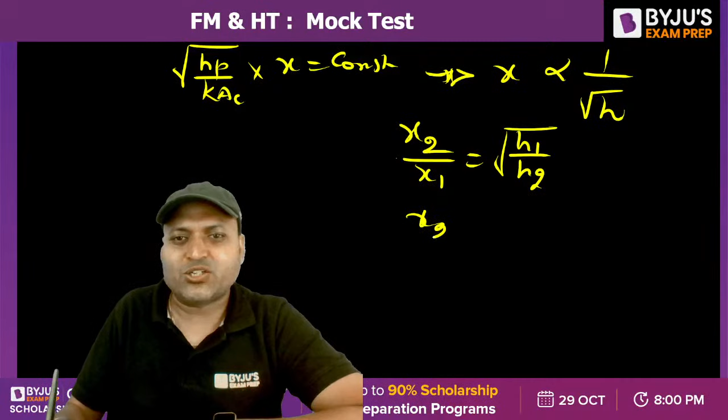So x is inversely proportional to root h. So x2 by x1 is equal to under root of h1 by h2. So x2 will be equal to x1, that is 16, into under root of 1 by 4. So it will be 8 centimeter.

Question 21, option B is the correct answer. Yes, God of thermodynamics, Pudina, well done. B is the right answer. Kiran, good. Question number 21, option B.

Mx is equal to constant. As long as the temperature is constant, we can equate m into x to be constant. What is m? What is the unit of m? M is called the Fin constant. The unit is, what is the unit of m? That is meter to the power minus 1, isn't it?

Question number 22. Again, from the beautiful concept, heat is conducted at a steady state through a solid wall with temperature gradient of minus 5 degrees Celsius per centimeter. There is a wall, there is a conduction. There is a conduction in the wall. Thermal conductivity is also given.

If the heat is exchanged by radiation, here there is a radiation. Heat is exchanged by radiation from the surface to the surrounding at 30 degrees Celsius. The surface temperature of the solid, we need to find out this temperature, Ts. We need to find out this temperature.

So what we can say from the energy equation? Again, from the energy equation, we can say Q conduction will be equal to Q radiation. Q conduction is minus K into area normal into dt by dx, is equal to, radiation can be written using Stefan Boltzmann law. This is Fourier law. Sigma into A into Ts to the power 4 minus T infinity to the power 4. Area getting cancelled out. We can find out without calculator.

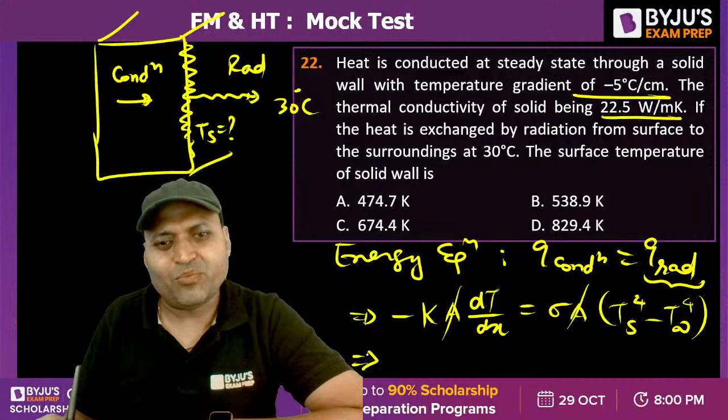We will not be able to find out Ts without calculator. Minus thermal conductivity is 22.5, into dt by dx is minus 5 degrees Celsius per centimeter. Take care of the units. Temperature gradient, write in terms of meter. So it will be minus 5 into 100, isn't it? Is equal to sigma, 5.67 into 10 to the power minus 8, into Ts to the power 4 minus T infinity. Convert it into Kelvin, plus 273, 303 Kelvin. So put the value 303 Kelvin. If you will do the calculation, you will get Ts. Please do solve and let me know the answer.

Are you getting option C? 674.4, option C will be the answer for this. Without a calculator, you will not be able to solve it. Anybody able to do it without a calculator? Yes, you can skip then.

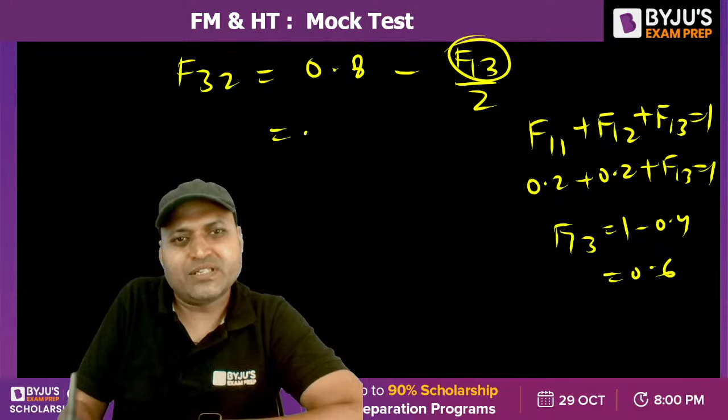How to find F13? Again from the summation rule, F11 plus F12 plus F13 is equal to 1. F11 is 0.2, F12 is 0.2. So 0.2 plus 0.2 plus F13 equals 1, so F13 is equal to 1 minus 0.4, that is 0.6. So 0.8 minus 0.6 divided by 2, that is 0.5.

Are you getting 0.5? Yes, 0.5 will be the answer. B is the answer.

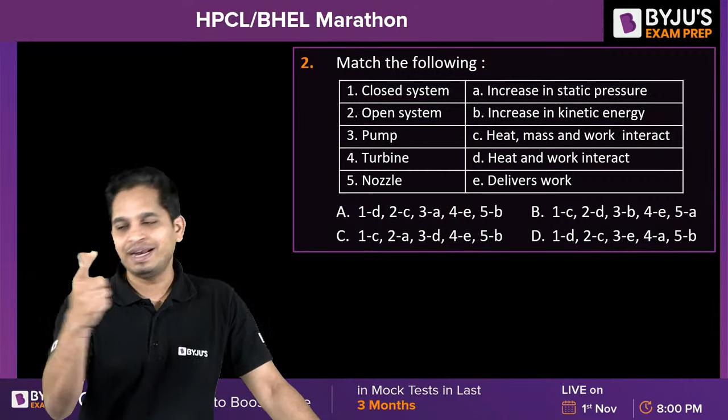B is correct or not, let us see. So closed system, only energy interaction, no mass interaction. And energy interaction can take place in the form of work and heat. So closed system is work and heat interaction, so 1D. Then open system, mass as well as energy, and energy will be either work or heat. So 2C.

Pump, what does a pump do? Pump increases the static pressure. Okay, anyway, if we don't know it, what do we know? That nozzle increases the kinetic energy, that is the purpose. Nozzle means exit velocity is much greater than inlet velocity, it increases the kinetic energy. Turbine delivers work, turbine delivers work. That means 4E, 5.

Oh come on please, don't do this yaar, come on. 1 cannot be C, yaar. There is no mass transfer in closed system, that is the whole definition of closed system. Why are you doing this to me? Come on, chalo, so the option is A. Okay, so the option is A.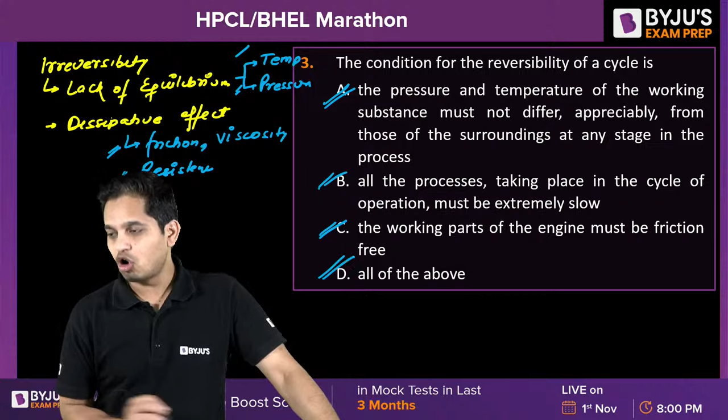And so this is right, yes. All the process in the cycle in the operation must be extremely slow, yes, to avoid friction, like quasi-static, extremely slow process. And it should be friction free. So yes, all the three options are correct, so all of them is correct. Okay chalo, let's move to the next question.

A 4-cylinder reciprocating engine. Cylinder diameter, stroke length is this and clearance volume is this. Engine capacity: number of cylinders are 4, diameter is 4 centimeter and stroke length is 7 centimeter. Tell us the engine capacity, swept volume, engine capacity, very quickly.

351 is correct, very nice. Yes, D is correct.

So if you put the values, this is 4, this is 7. You do not need to convert them into centimeter because the answer you need in cubic centimeter. CC means cubic centimeter, so you want it in centimeter cube. That's why you are not going to convert them. So this is centimeter square and this is centimeter, and the answer you are going to get is centimeter cube.

I would say do not use calculator because you would not have a calculator in the exam. Numerical questions, give around 1 minute or 1 minute 15 seconds, and conceptual questions take 15 to 30 seconds, not more than that, so that you can utilize that time to solve numerical questions. Chalo, let us move on.

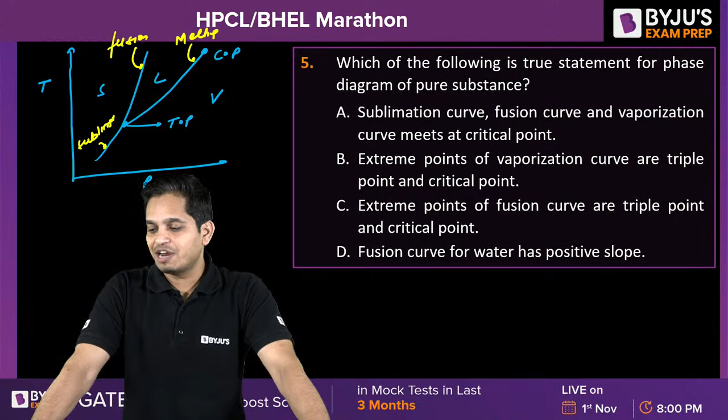So the question says sublimation curve, fusion curve and vaporization curve meet at critical point. No, they meet at triple point. Mechanical warrior, your option was wrong. All the curves meet at triple point, not critical point.

Vaporization curve, I'm sorry, this is vaporization. Melting and fusion is same, this is vaporization and evaporation. So extreme points of vaporization curve are triple point and critical point.

Yes, the extreme points of this curve are triple point and critical point, so this is the correct option. Extreme points of fusion curve are triple point and critical point - no, it is not. It is one triple point and the next I don't know.

And fusion curve for water has positive slope - no, all other substances except water have a positive slope. For water it has negative slope, this is for water. So this is wrong, this is wrong, this is wrong. Only B is correct, yes, triple point.

So do not be in such a hurry that even if you know the answer, you mark the wrong answer. Just write it, read it properly. Okay, let us move on.

A 120 volt electrical resistance heater draws 10 ampere. It operates for 10 minutes in a rigid volume. Calculate the work done, very quickly.

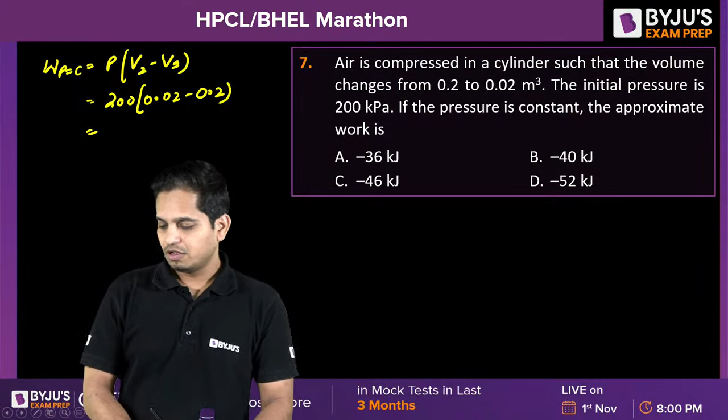7A I think is correct. Let me check. Pressure is 200 kilopascal. Constant pressure work is P into V2 minus V1. This is 200 kilopascal times 0.02 minus 0.2. So you will get how much? 7A, yes that is correct. Very nice.

Let us move on. Yes, mechanical warrior, that is correct. Let's be a little fast, okay? Next question: a cylinder contains 5 meter cube of ideal gas at pressure. This is volume. Since it's an ideal gas, we can apply the ideal gas equation.

Pressure is 1 bar. Now it is compressed in an isothermal process till its pressure increases to 5 bar. So pressure was 1 bar, P1, and it will increase to 5 bar, P2. Using an isothermal process, we need to find work done in kilojoule. How will you do that? Work done is P1 V1 ln(P1 by P2). We know P1, we know P2, we know P1 and V1.

8 says A, yeah I think that is correct. So P1 is 1 into 10 to the power 2 kilopascal, times 5 ln(1 by 5).

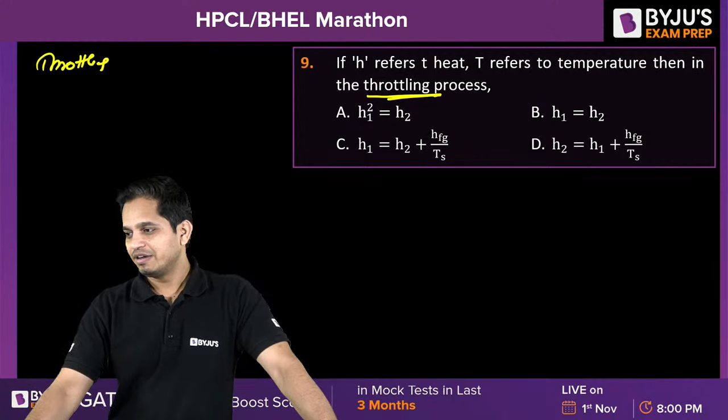Moving on. This one everyone can tell. What is the right answer? We are going through the throttling process. What is throttling? Everyone? Yes, very nice. 9B, very good. Yes, everyone should know this.

It is an iso-enthalpic process and it is an irreversible adiabatic process. So here dQ equals 0, no work done, dH equals 0. Initial temperature equals final temperature, but it is not isothermal, because the temperature changes.

This is the question, yaar. These are all previous year questions. You just need to know the level. If I bring GATE questions, there is no point, you will only get demotivated. That's all. Every question has come in an AE level exam, assistant executive, assistant engineer exam level or executive exam level.

So H1 equals H2. Okay, let us move on.

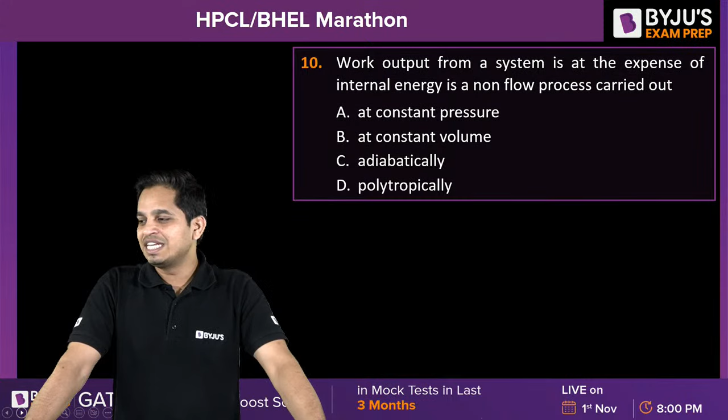Okay, you should give the answer by this time. Work output at the expense of internal energy, what is the answer? Come on.

10 is C, very nice. Yes, okay. So for a closed system, we have dQ equals dU plus dW. And for an adiabatic process, dQ is 0 and dU equals minus dW. So work happens at the expense of internal energy. Whatever internal energy the system has, you utilize that to produce work. C is the right answer.

Let us move on, this is very easy. You are going from K, either you can take this path, or this path, or this path. Which option is correct? Which is a true statement? Question 11, options A, B, C, D.

Very quickly, for question 11 A and B: will work remain same, will heat remain same, will entropy generated remain same, or will internal energy remain same? Whatever path you take, which quantity will remain same? 11 A.

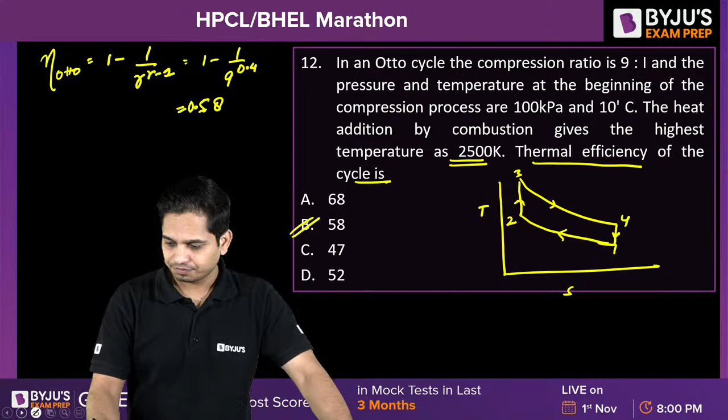Chalo. An electric generator coupled to a windmill produces an average electrical power of 6 kilowatt. So electrical work is 6 kilowatt and the power is used to charge a storage battery.

So you are charging this. Heat transfer from the battery is given. What will be the amount of energy stored in the battery in 2 hours? Calculate very quickly. There is a battery, you are giving electrical work

of 6 kilowatt. And what is happening? Q loss is happening - how much? 0.3 kilowatt. So calculate the energy stored in battery. Energy stored in battery.

I don't know which question you are answering. Please write the question number. That's why I was saying in the beginning, write the question number and then the option, so it is easy for me. Why do you want to make my life difficult? Come on, it is already difficult. Please make my life easier. Come on, write the question number 13B.

I guess it is B. Let me check. I don't know, let's check. Okay.

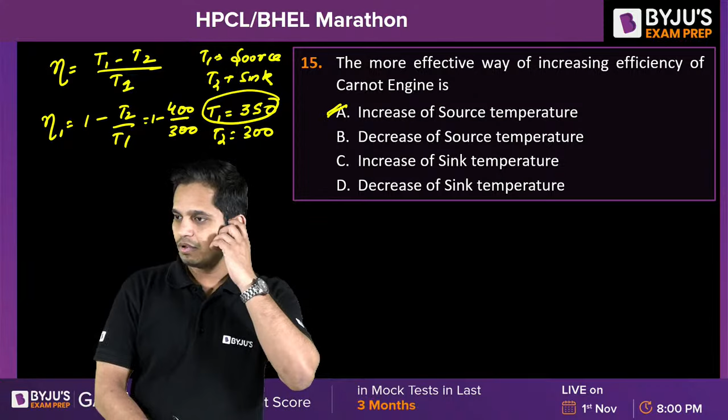So what is the efficiency of a Carnot cycle? It is T1 minus T2 upon T1, where T1 is source temperature and T2 is sink temperature. If you increase T1, numerator increases but denominator also increases, so efficiency increases, but only a little. But if you decrease T2, only the numerator increases, so efficiency increases more. You can verify this with an example: take T1 as 350 and T2 as 300. First increase the source temperature by 50 degrees to 400, giving 1 minus 300 by 400. Then instead, keep T1 at 350 and decrease T2 by 50 degrees to 250, giving 1 minus 250 by 350. You'll see efficiency 2 is greater than efficiency 1. So the most effective way is to decrease the sink temperature - for the same temperature difference, decreasing sink temperature increases efficiency more. So D is the right answer.

Next question: an IC engine produces an indicated power of 12 kilowatt, with mechanical efficiency given as 90%. We need to calculate friction power. Friction power equals indicated power minus brake power. I don't know brake power directly, but mechanical efficiency equals brake power upon indicated power, so 0.9 into 12 equals brake power, which is 10.8 kilowatt. So 12 minus 10.8 equals 1.2 kilowatt. 16A is the correct answer, 1.2 is right.

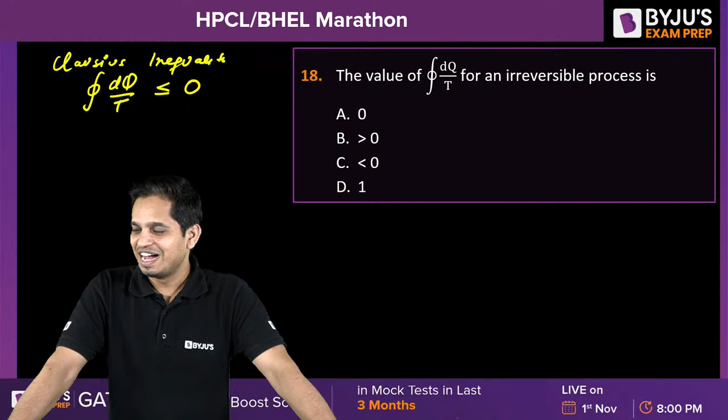So it is 0 for a reversible cycle and it is less than 0 for an irreversible cycle, so less than 0.

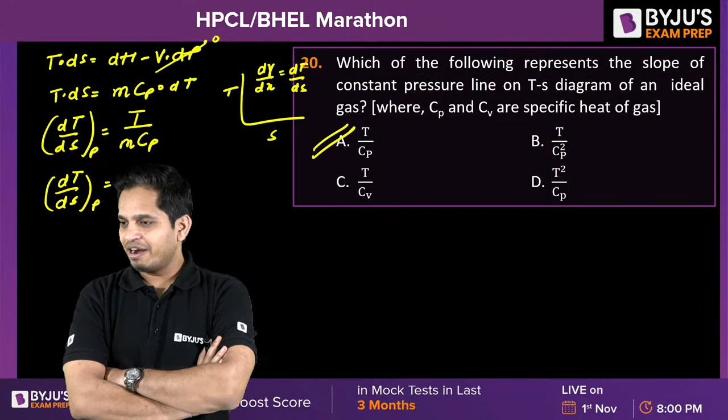Do not get confused. Write all the formulas all together somewhere and revise them on a regular basis. Okay, next question.

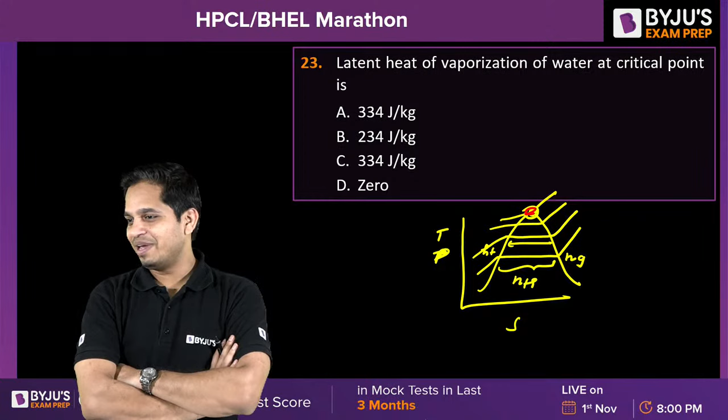D is the right answer.